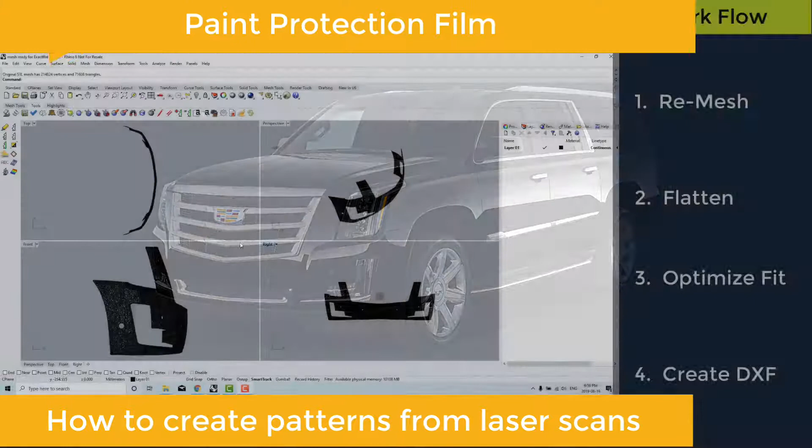Hi, this is Ethan, and this is an Escalade. Today, how to make a paint protection film pattern from laser scans. We're starting with a finished laser scan that's already been imported into our CAD program, and we're going to go through the process of flattening this laser scan and creating a template that can be put back onto this Escalade's lower front fascia. So let's begin.

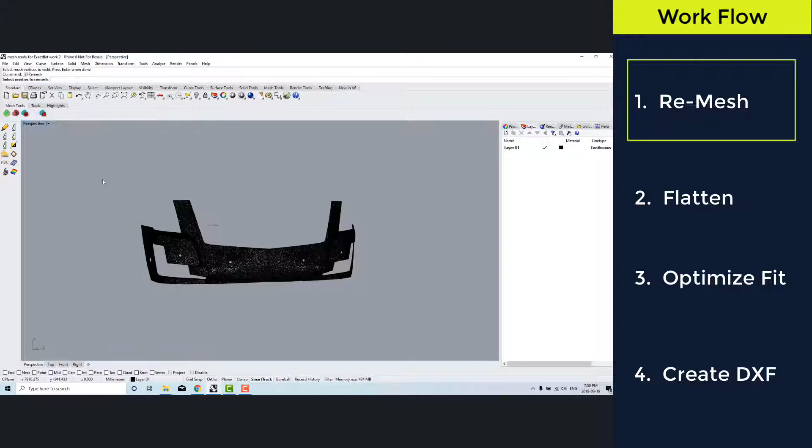The first thing we're going to do is create a new mesh, because the laser scan often picks up excessive detail that is not helpful. It just slows us down. So we simply select the part in question. We have a couple of settings here. We're not going to talk too much about the settings today. Generally speaking, once you set this up, if you're in paint protection film, you don't have to do it again.

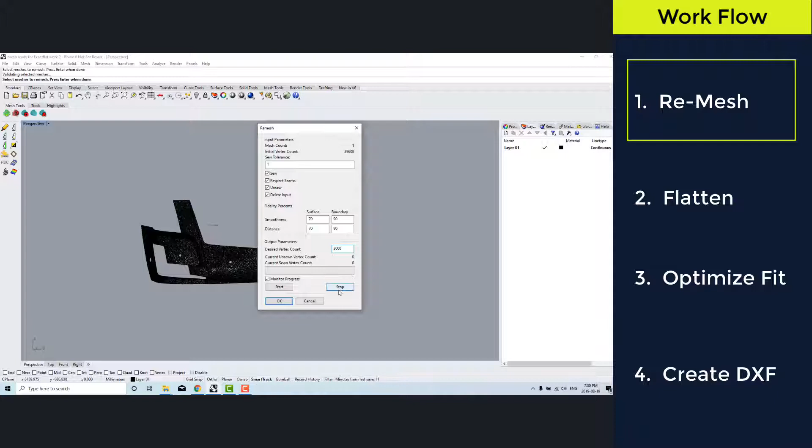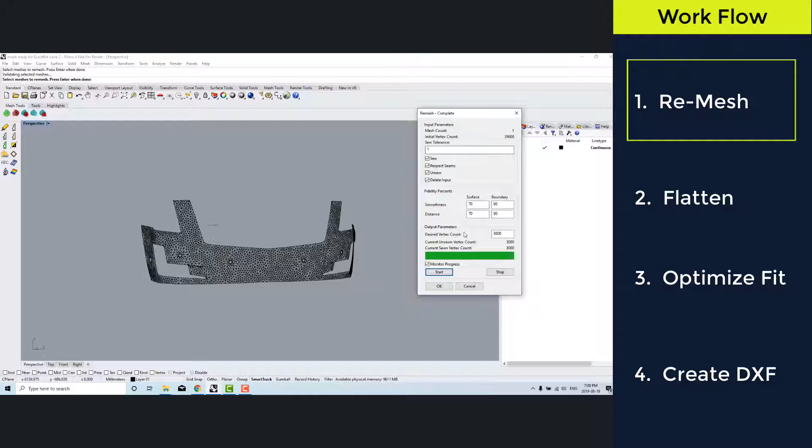Essentially what's going to happen is we're going to reduce the complexity of the mesh and have it better represent the geometry that we want. So we click Start. Now let's look closely at what's happening here. We are decimating, or reducing the number of vertices on this mesh, and you can see the triangles are redrawing themselves. It does this in just a few seconds, certainly under a minute on a part like this. And that's it. Now we have a part that's going to better represent the geometry, giving us more accuracy, and we've deleted the unnecessary detail that is not helpful for creating a pattern.

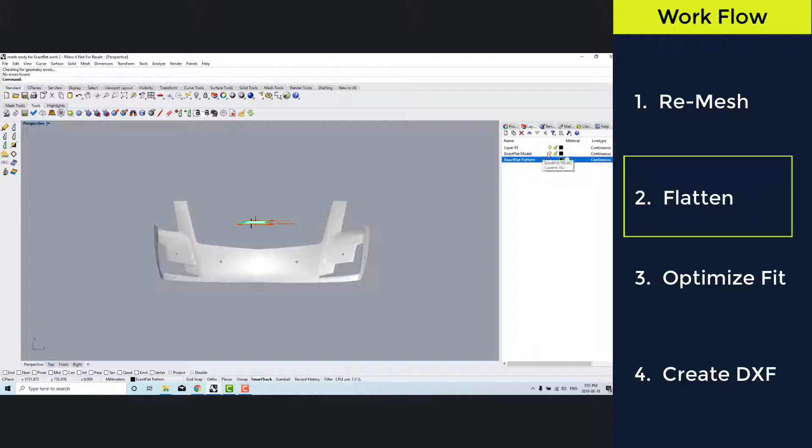Next, we're actually going to flatten this. It's pretty easy to flatten. You select it, you hit enter, and there it's flat. But our job is not done yet. We have to optimize this still, so let's just go into a different view and talk about the results of this initial stage of flattening.

So here's our 3D part, and here it is in shaded view, and it's been flattened. You can see the red and the yellow — those are areas of high strain or elongation where you'd have to stretch that film. But we're going to eliminate that. We're going to optimize the shape of these patterns because it is not yet ready to put on the car.

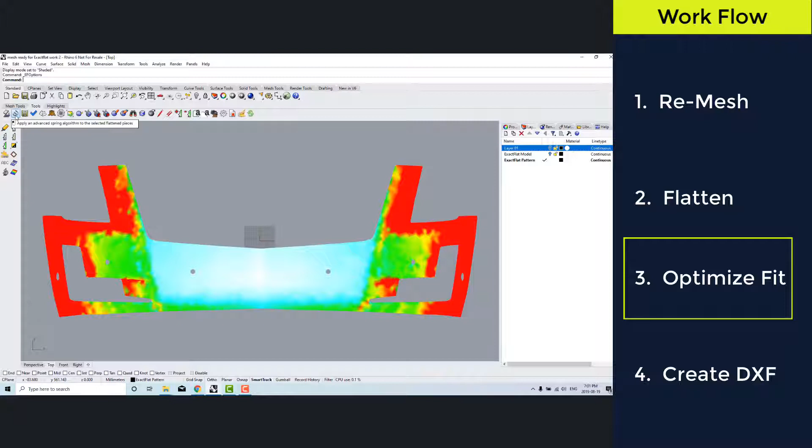We do that by optimizing our fit. We have our spring process right now, and the spring process is pretty simple. You select the part, you hit spring, and it's going to redraw the boundary and the pattern geometry, searching for areas of strain and areas of sag. These are bubbles or wrinkles that it'll be searching for and eliminating. You can see by our color code, it's changing, essentially trying to optimize the entire pattern piece for minimal strain and minimal sag.

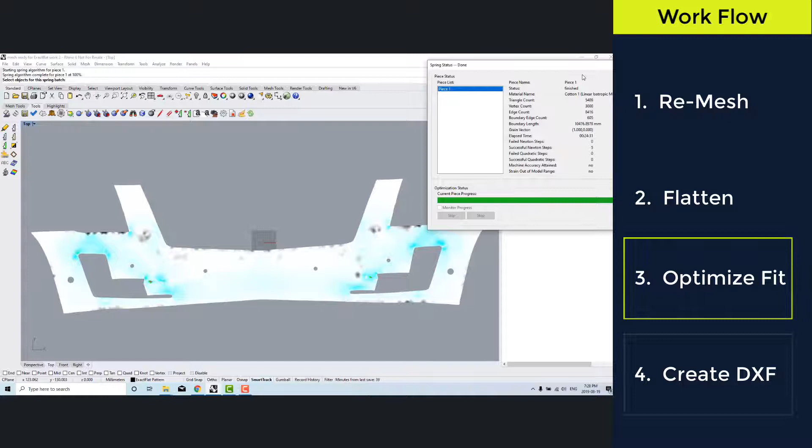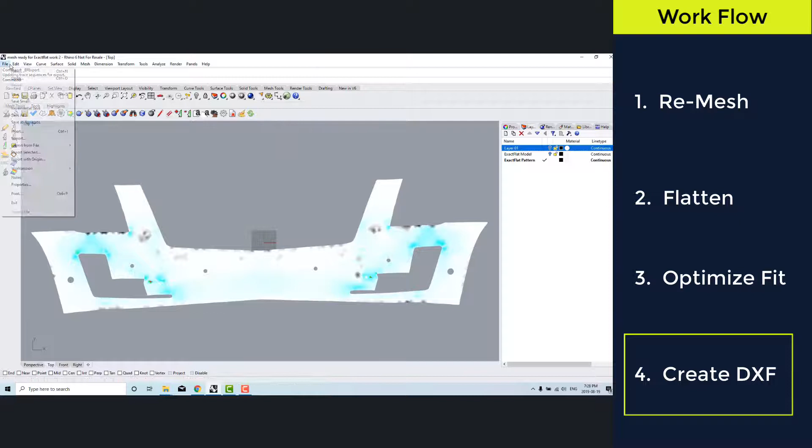Now, in order to do that, we're going to save this file as a DXF file. DXF files are the files you use for plotters and cutters. So you have two choices here: you can either send this to a plotter and plot it out, then lay your film down on top of that template and use an X-Acto knife to cut out your template, or send it to a cutting table to get things precision cut. With a perfect pattern and precision cut, you're going to get a very well-fitting part afterwards.

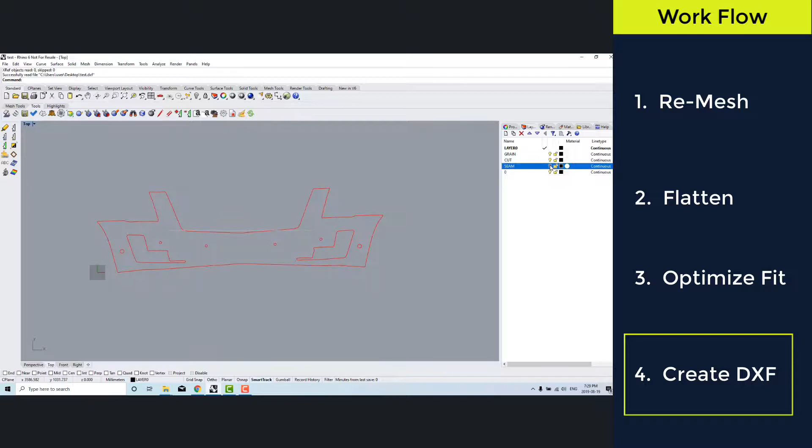And there it is, that is the finish. You can see there's a faint white line there — not to worry about that, that's a grain line, useful for other industries like carbon fiber and other types of industrial fabrics. But for paint protection film, if you don't like it, you can just turn it off, it's not that important. And that's it. This has been, for paint protection film pattern makers, how to create a pattern from laser scans.